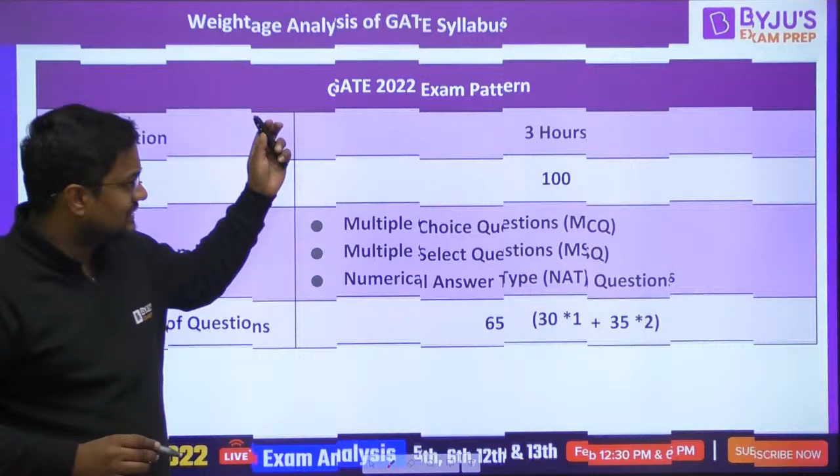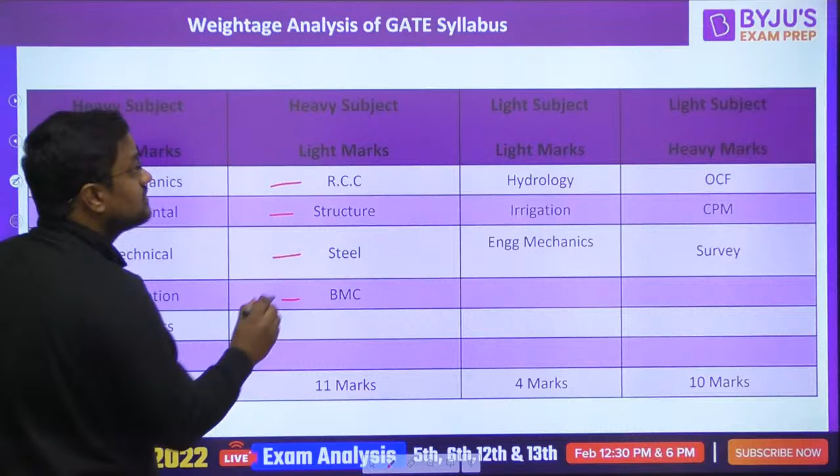Before that, I'm coming to the topic. Just don't see this, otherwise your focus will be diverted. So you all are tensed - why are you tensed? Why are you nervous?

Because you are thinking that if your GATE examination does not go well, then your career will not be so bright. You are thinking like that. Let me tell you one thing, many students already know this. I have told them that with a good GATE score, good marks, good rank, you are getting a very good future, very good MTech college, very good PSU, very good MTech or branch. But a very good career is not only through GATE.

There are multiple exams after that also, like BARC, like state PSUs, like many PSUs that take their own exam, like Engineers India Limited. I'll give you a list also, I'll give you that list today.

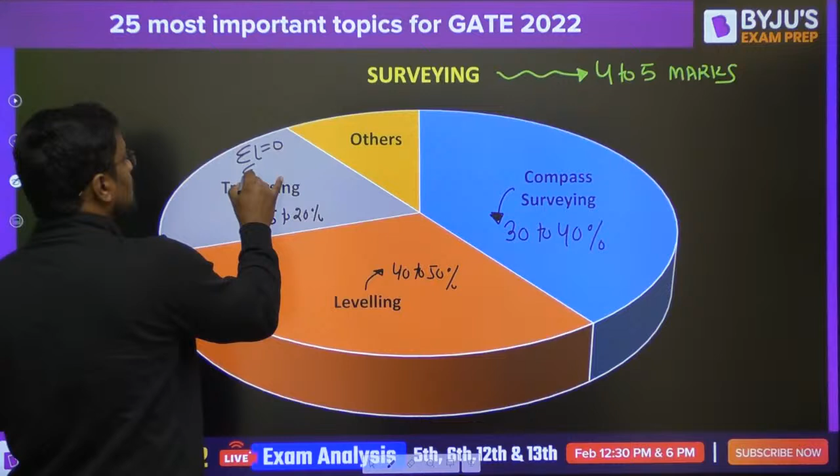And guys, here traversing you can expect 15 to 20% questions. And what will be coming most of the times is that summation of latitude equals 0, summation of departure equals 0 - on basis of this equation some question will be coming. And from all other topics, guys, you can expect around 5 to 10%. Like chain surveying is important for engineering services, but not for GATE.

Chain surveying, tachymetry, GPS, GIS, remote sensing, photogrammetry, plane table surveying - you can expect 5 to 10% questions from these. Guys, if you are giving GATE 2023 or 24, then you should go in depth for these topics.

And if you are giving GATE 2022, you should at least revise these topics: compass surveying, leveling, and traversing. In traversing, what is the numerical coming? Summation latitude is equal to 0, summation departure is equal to 0, or any numerical based on latitude and departure, because that topic is all about that.

In leveling, guys, reciprocal leveling or correction for curvature is most important. And in compass surveying, declination and local attraction are most important. Already, when I'm saying this, I'm assuming that you know bearing and all about included angle.

So have you got this? So in surveying, these three topics are the most important. And in this, what are the subtopics? Correction and reciprocal leveling, and latitude and departure - traversing is all about that only. So these are the topics for surveying.

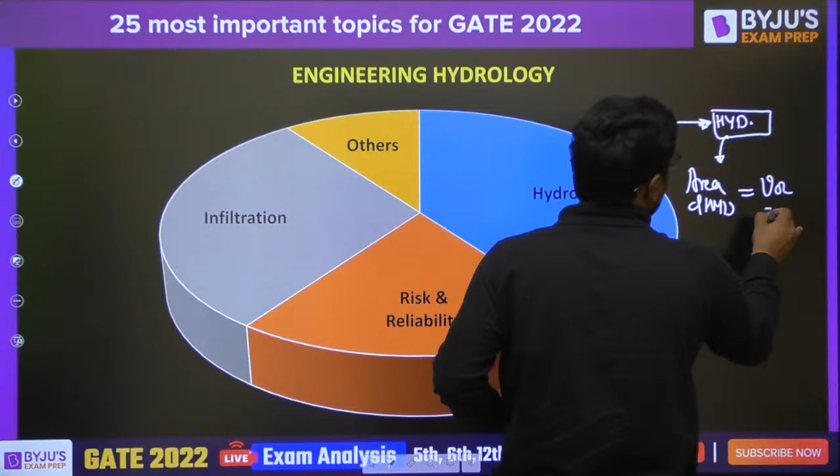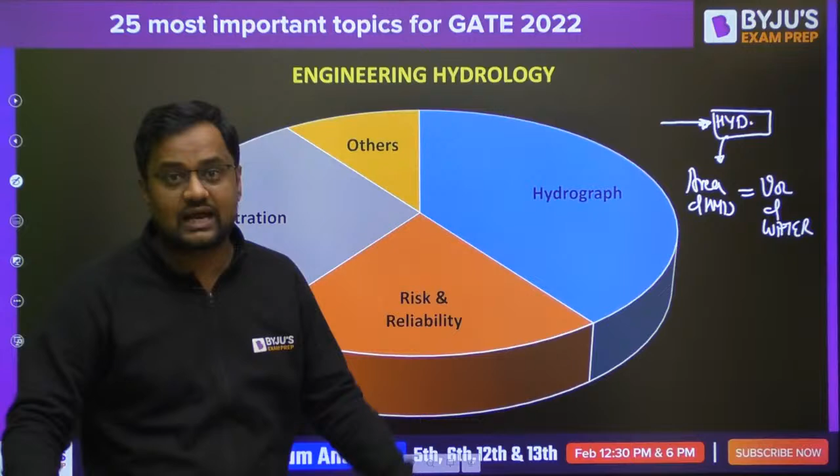Now hydrology. In hydrology, guys, in hydrograph, 90% of numericals are solved from one concept: area of hydrograph is equal to volume of water. Guys, in previous year questions, if you solve 40 questions of hydrograph, you will see that 90% of those questions are solved from this concept - area of hydrograph is volume of water, whether it is unit hydrograph or direct runoff hydrograph.

Then, guys, infiltration. In infiltration, there is Horton's curve, phi index, and W index. I'm writing phi and W together because both are average values, while Horton's curve is infiltration that is varying. Now for GATE and for engineering services, all are equally important, but for GATE this is more important. So if you want to practice more and revise more, in infiltration you can go for phi and W index. Although a couple of times questions have been asked from Horton's curve as well. But still, if time is less and you want to study only limited data, focus on phi index and W index, hydrograph, and then if time is there, you can go for risk and reliability.

Guys, risk and reliability is just a 10 minutes topic. In 10 minutes you can understand and solve all questions. So 3 topics from hydrology will be hydrograph - in hydrograph there are so many topics, but most questions will be solved from this equation: area of hydrograph is volume of water. Now infiltration - these 3 topics will be there, but for GATE point of view, phi and W will be more important, along with risk reliability.

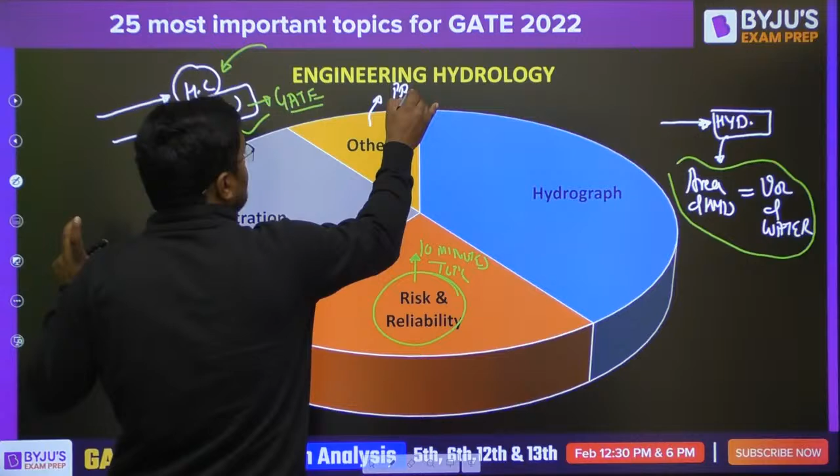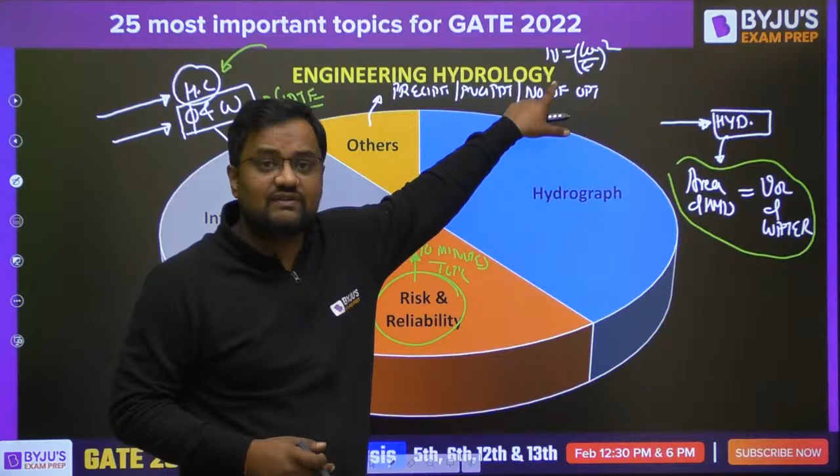Now others will have 10% or 15% chances. What are others? Others will be precipitation, average precipitation, the number of rain gauges. Guys, the formula for optimum number of rain gauges, N equals CV by epsilon whole square - hardly a question has been asked from this in GATE in the last 25 years. Yes, the question is asked in engineering services objective and subjective, but in GATE, I think 0, 1, or 2 times the question has been asked in the last 25 years.

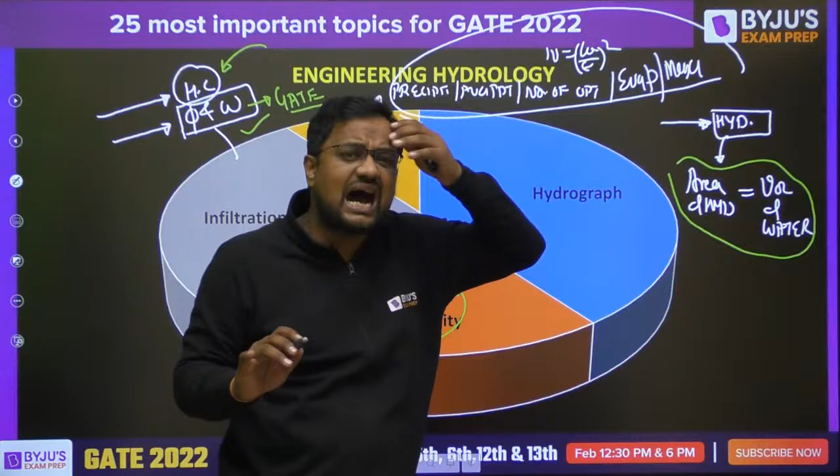Now, evaporation, Colorado sunken pan, ISI pan, methods of evaporation, factors affecting evaporation, Meyer's equation - all these topics consist of 5 to 10%. In engineering services these topics will be coming, but in GATE, all these topics are hardly or rarely asked. So you can go to hydrograph and phi and W.

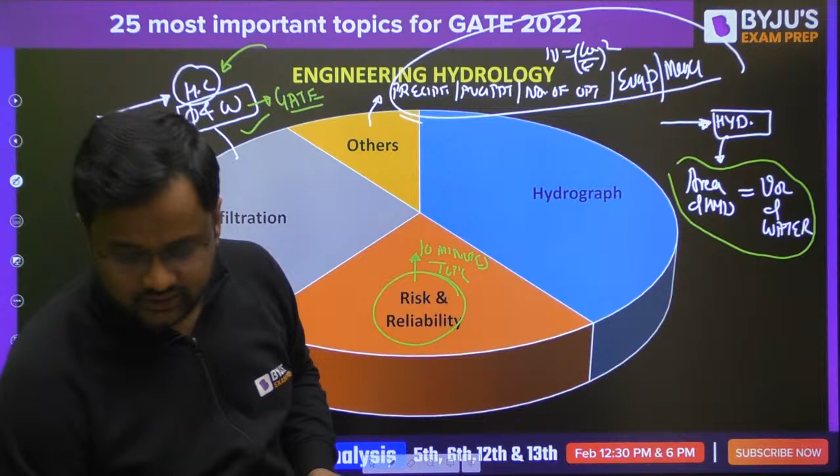Risk and reliability I'm not counting in the 25 topics because it is very, very small. Everybody, please let me know, are you understanding me or not? Share the session with everybody.

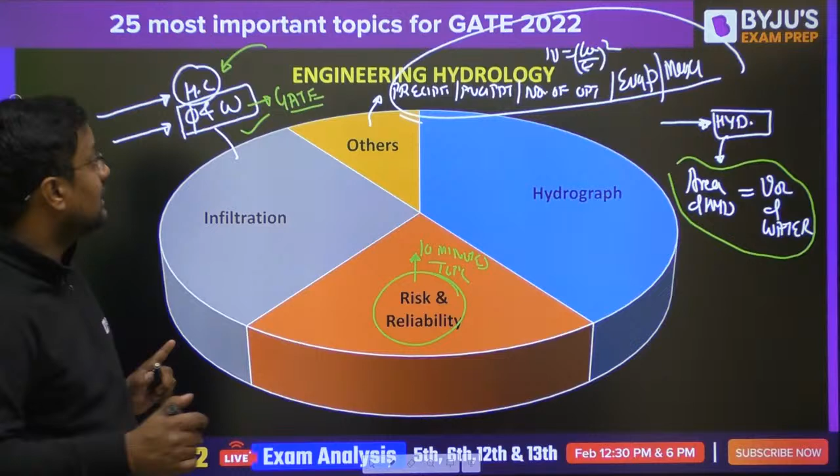I have told you the topics for till now only two subjects. First is surveying - traversing, compass and leveling. Then it is hydrology - hydrograph, risk and reliability, and infiltration. Surveying is coming 4 to 5 marks and engineering hydrology will be coming around 2 to 4 marks. If you study these three topics, out of 4 to 5 marks, whatever is coming, you will be scoring 90%, I think here it is 100% if you study these three topics.

Now coming to the next subject - strength of materials. This subject is having a weightage of 11 to 13 marks in 2011, 2010, 2012, 2013. But from last 2 to 3 years, the average weightage you can expect from here is 7 to 8 marks, even I should not write 7 - why is it, this is my subject so I should write heavy - no, 6 to 8 marks. But if you see 2010, 11, 12, 13, it is 11 to 12 marks.

Many students are doing one mistake, that they are taking the weightage of a subject from the average of last 30 years. Guys, no. Last 5 years average you have to take, because many reasons. First, in last 5 years, 3 to 4 new subjects have been added, like railway, airport, building material, PERT CPM, engineering mechanics. So last 3 to 4 years, 4 to 5 new subjects have been added.

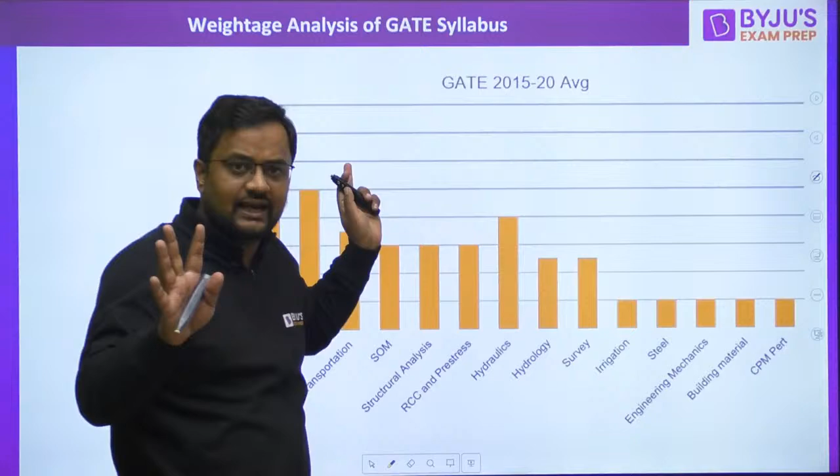What are the opportunities without GATE, that I will tell. What is the cutoff? Toppers' marks I will tell for every category. How many percentage of people will be clearing, that also I will be telling you at the end.

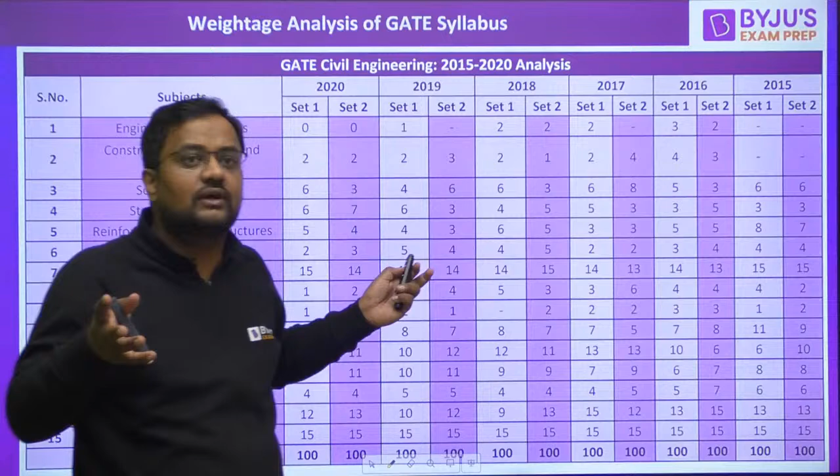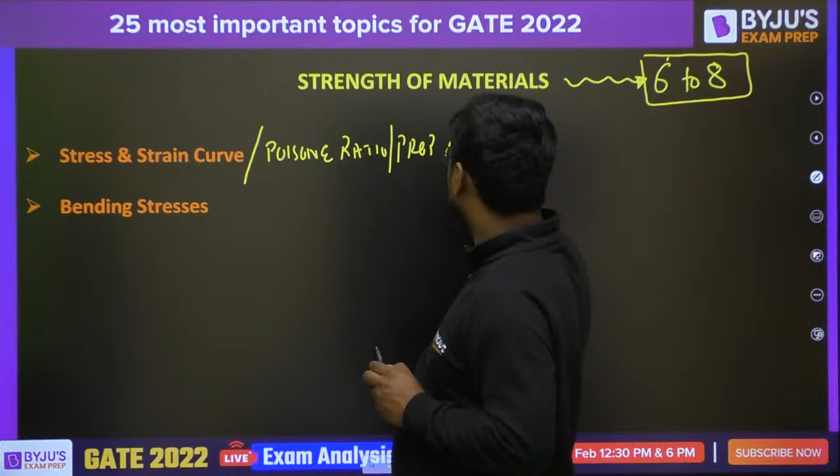Now, 2 subjects have been done. Now SOM - in SOM, the most important topics are stress strain curve. In stress strain curve, I am assuming that Poisson ratio is also here only - Poisson ratio, properties of material, deformation of bar, that PL by AE, deformation - all these are here. Then bending stresses.

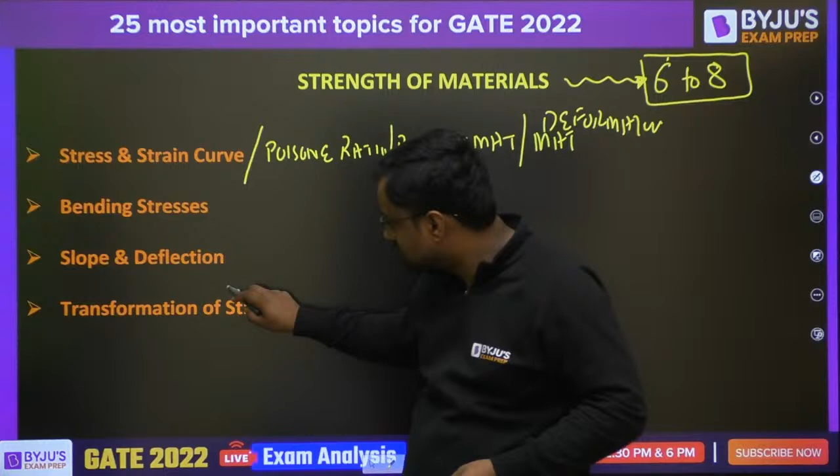Shear stress is not that important as bending stress. The sigma by y is equal to m by I is equal to E by R, having more numericals, more application on the GATE exam rather than tau is equal to SAy bar by IB. Then it is slope and deflection and transformation of stresses. Transformation of strain is not that important. Mohr circle for stress is important. Mohr circle for strain is not that important. Strain rosette is not that important. So transformation of stresses - if you have limited time, then you can skip transformation of strain.

Now coming, these from 6 to 8 marks, these are my 4 topics that you should study. Now coming to geotechnical engineering, it is not one of the highest weightage - it is not one of the highest weightage for the GATE exam. It is the highest, guys, it is the highest.

You can expect from here around sometimes 14, sometimes 15, sometimes 16 marks - 14 to 16 marks. But guys, many people are, since this is my subject, giving high importance to geotechnical and not to hydrology. Why? Because geotechnical is 14 to 16 marks and hydrology is only 3 marks, surveying is only 5 marks. Guys, if you see syllabus-wise, then survey is more scoring, hydrology is more scoring than this geotechnical.

Suppose survey is 5 marks and geotechnical is 15 marks. But the syllabus of geotechnical is more than 3 times that of survey. So marks-wise it is 3 times more, but syllabus-wise it is 5 times more than survey.

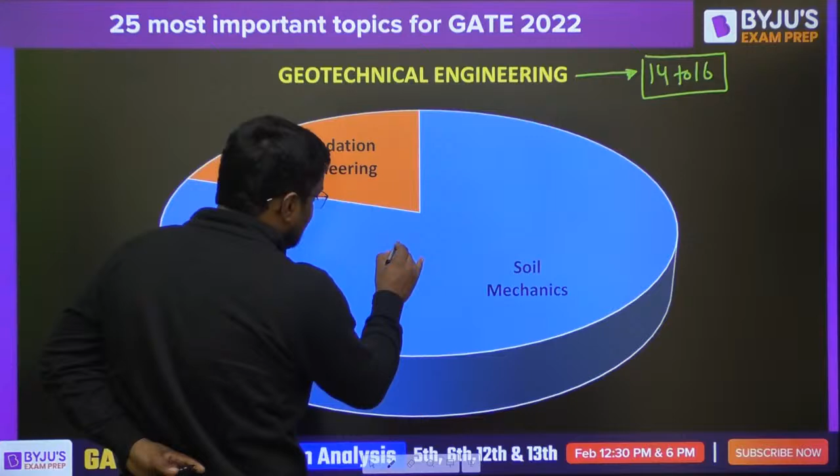So from 14 to 16 marks, you can expect around 11 to 13 marks from soil mechanics and 2 to 4 marks from foundation. Now what is important? Soil mechanics is not the topic itself. Let me come to the topic now.

Geotechnical engineering, guys - quicksand condition. I'm not saying the whole seepage, just the quicksand condition plus this: Q equals K into H into Nf by Nd. This formula is important in soil. Then another important one is Terzaghi bearing capacity.

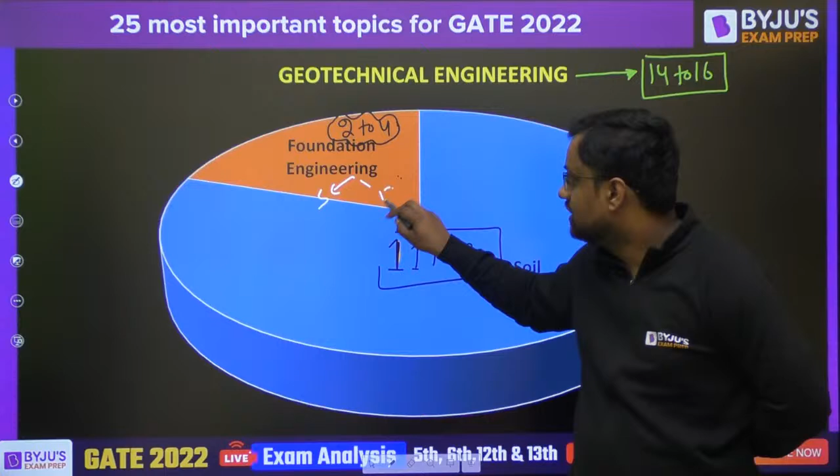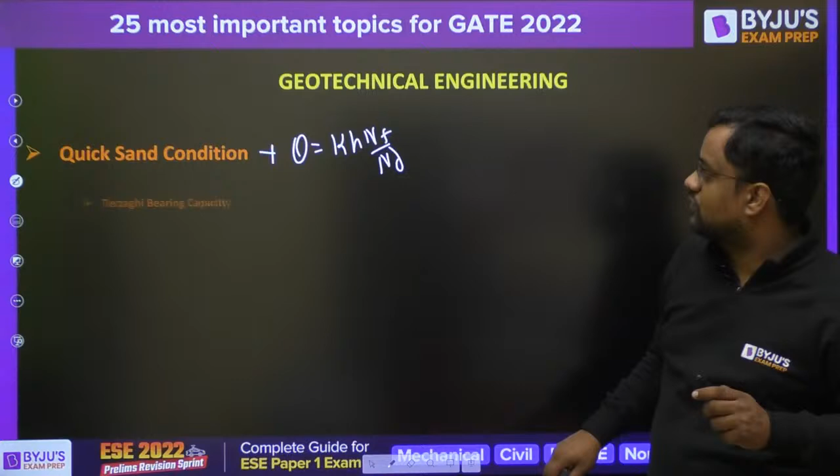This is shallow foundation, right? Foundation has two types: shallow and deep. In shallow there is Terzaghi, Peck-Hansen, Meyerhof, IS code raft - many things. But guys, even though shallow foundation has many topics like Terzaghi, Skempton, Meyerhof, IS code, 99% of questions will come from Terzaghi bearing capacity, not from Peck-Hansen, not from Meyerhof, not from IS code raft. Okay, now time rate of settlement - this formula Tv equals Cv into T by D square.

This formula. Okay, now Darcy's law: V equals KI, or Q equals KIA, or seepage velocity equals discharge velocity upon porosity - these things. Okay, and the phase diagram - I'm covering all these equations. Se equals WG, gamma bulk equals G plus SE upon 1 plus E into gamma W. Then for gamma dry, S will be 0. For gamma sat, S will be 1, and N equals E upon 1 plus E. Then gamma submerged equals gamma sat minus gamma W. All these formulas are most important.

Guys, I'm not saying anything skippable for pile foundation. Pile foundation - whether it is clay, whether it is sand, whether it is group capacity of pile - all are equally important. Yes, in pile foundation, I can say come back to this.

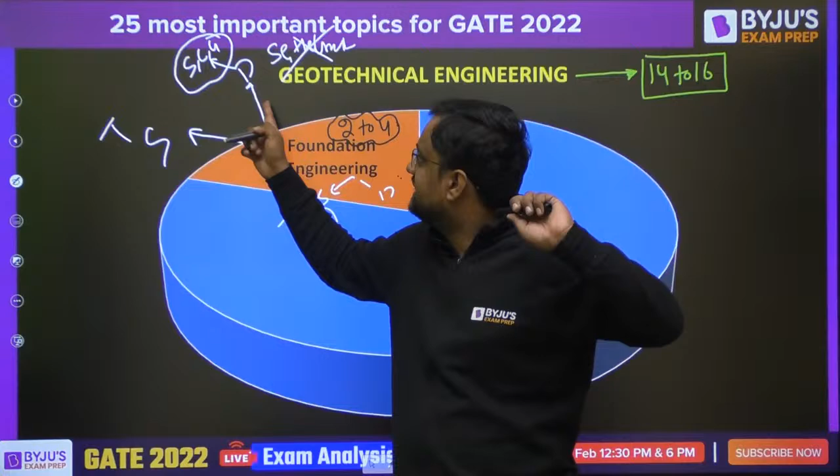In foundation engineering, it is shallow and deep. In shallow, what is important? Terzaghi. In deep, what is important? Sand, clay and group capacity - all equally important. Now settlement you can neglect - there are some numericals of settlement also, but settlement of pile you can neglect. In shallow, focus on Terzaghi. In deep foundation, focus on sand, clay and group capacity. Settlement you can neglect, okay.

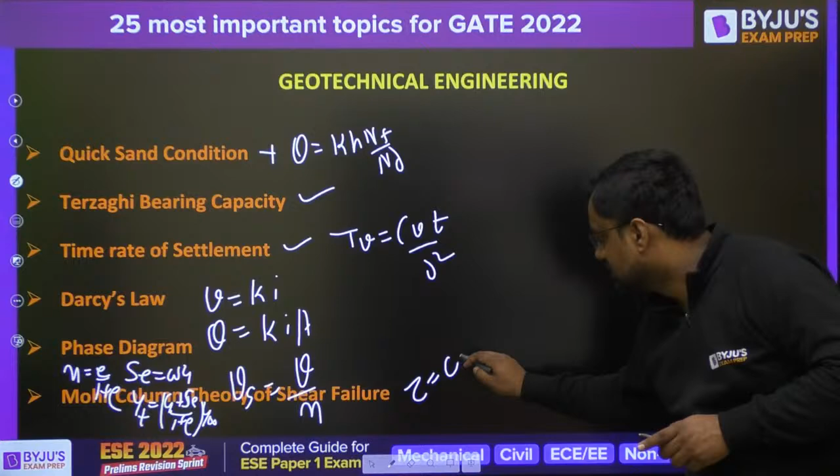And in soil mechanics, these are the important topics. Yes, you can't neglect Mohr-Coulomb for now. Tau equals C plus sigma tan phi. And then the sigma 1 and sigma 3 relation - that is also important.

So if you study this much, guys, and you are 100% accurate - I am assuming you will be 100% accurate - then in these topics you can expect at least 8 to 10 marks. But I'm assuming you are 100% accurate in these topics.

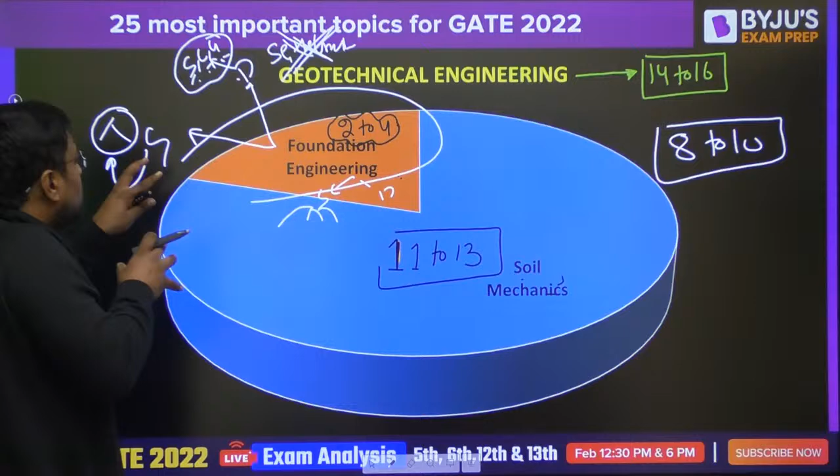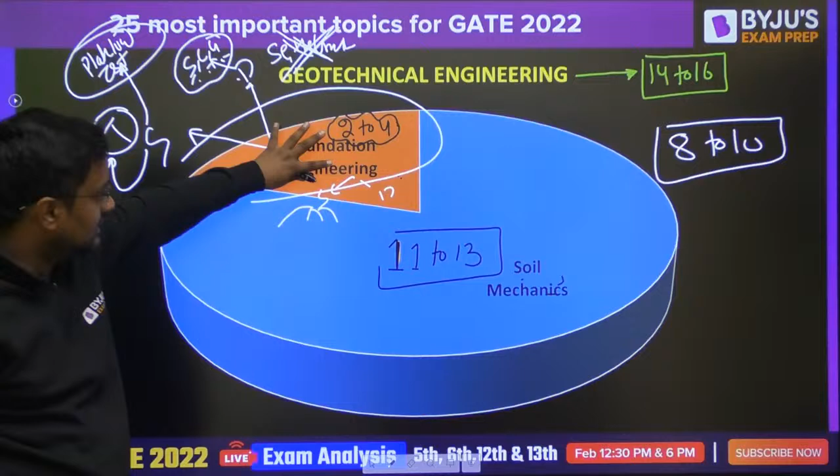Because if foundation comes, then you study Terzaghi. If you study Terzaghi from shallow foundation and the three topics from deep foundation, then 100% will be covered. To be safer, in shallow foundation do one more thing - plate load test. There are a couple of formulas there, nothing to understand, just empirical formulas.

Do that - 100% coverage here. And with these topics that I discussed, you can cover 60 to 70% of soil mechanics, so you can expect 8 to 10 marks. But I'm assuming you will be 100% correct in that way.

Vignesh Mahajan - I have a Google Meet with him at night, 1 a.m. or 2 a.m. He has some COVID, he was feeling depressed, now he's okay.

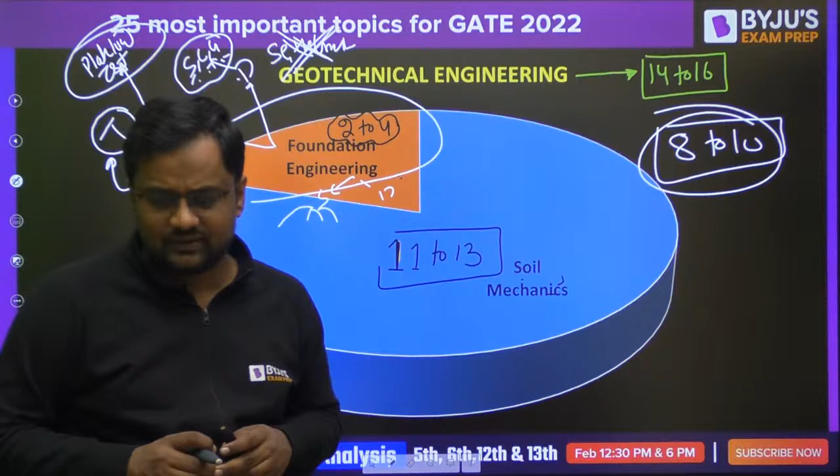Okay, now coming to fluid mechanics.

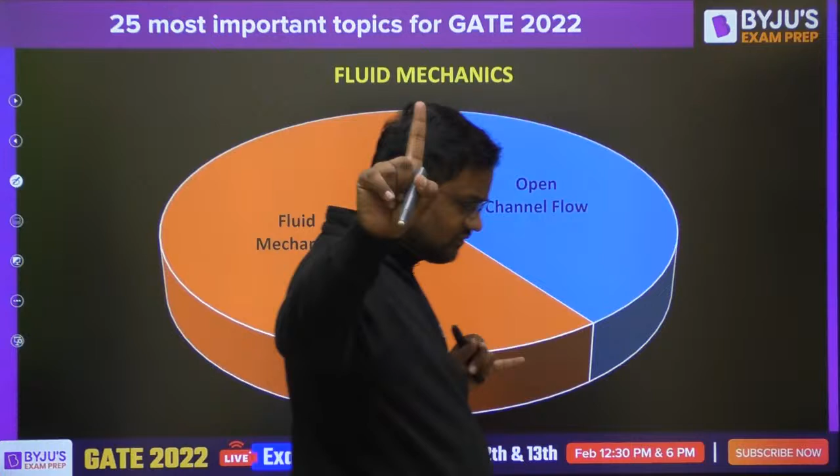Okay, now coming to the fourth. Let me see how many. First, survey - in survey, what were the important things? Leveling, compass surveying and traversing. Then hydrology - hydrograph, phi index, W index and reliability. Then SOM, that is bending stress, transformation of stress, Mohr circle, stress and strain, slope deflection. Fourth is soil mechanics. Okay, thank you Aruj, Sahil, Aman, everybody is here.

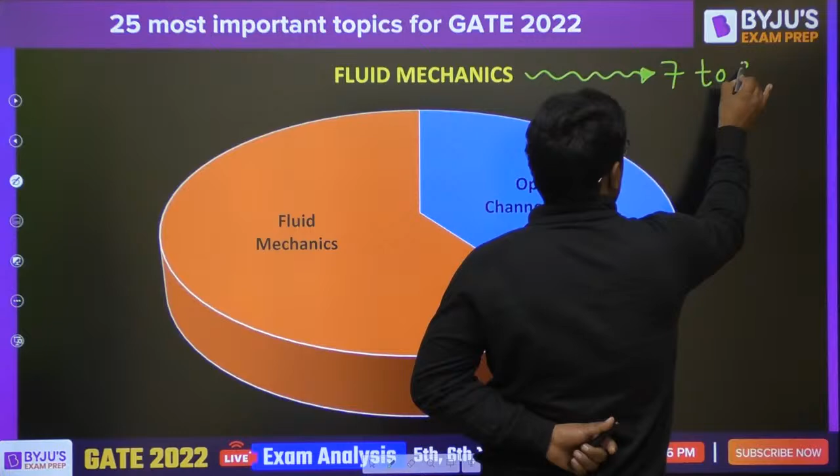Now coming to fluid mechanics. Fluid mechanics is quite interesting. Guys, you can expect 7 to 9 marks. And if I differentiate in terms of syllabus, then fluid mechanics and machine will be around 80 to 70 hours. I'm assuming fluid mechanics and machine both approximately.

That depends on individual to individual. My way of teaching is a little bit fast, so suppose someone is teaching in 80 hours, then I can finish in 70 hours because my speed is a little bit fast. And OCF is around 18 hours, or 15 to 16 let us say.

So syllabus wise, this is at least 6 times more. The syllabus wise fluid mechanics is 6 times more than open channel flow.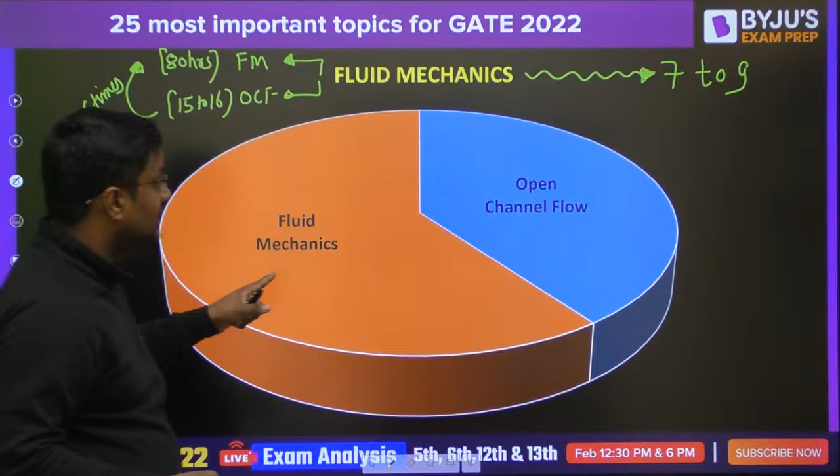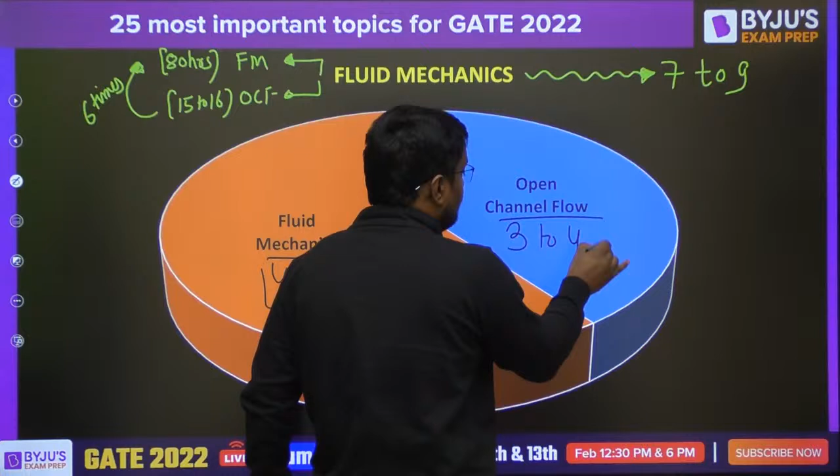But if you see it in terms of weightage, then out of 7 to 9 marks, 4 to 6 marks will be of fluid mechanics and 3 to 4 marks of open channel flow. So it will be around 35 to 45%, and this will be around 55 to 65%. So it is quite obvious that open channel flow is quite scoring than fluid mechanics.

Praveen is asking what number of MSQ we can expect. In computer science, I'm not exactly 100% sure, but it's 12 to 14 MSQs. In electrical engineering, it is 0.

I don't know how IIT can do this, because I totally respect IIT Kharagpur, but if any organization says there will be 3 types of questions - MCQ, MSQ and NAT - then how can the total 65 questions, 100 marks comprise only of NAT and MCQ, with 0 MSQs? That is quite a question to IIT Kharagpur. How can you say there are 3 types of question when the third type is 0? And in electronics and communication engineering, there are 14 MSQs.

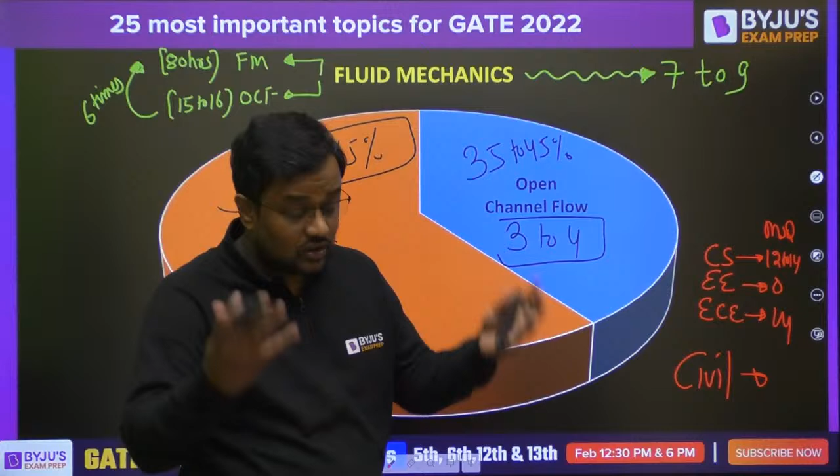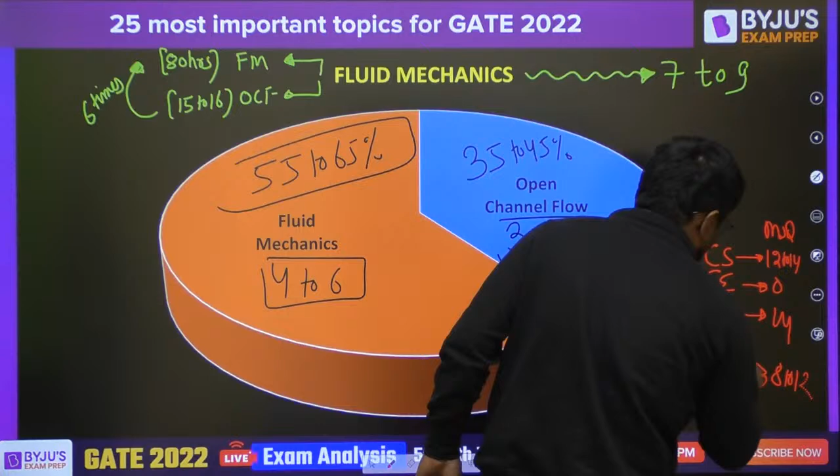For civil guys, it can be anything depending upon IIT Kharagpur professors and with what thought they are making the paper. But my guess, that is a total wild guess, will be around 8 to 12 - or 8 to be on the safer side, rather than writing 8 to 10, I am writing 8 to 12. To be 100% safer, I can write 0 to 65.

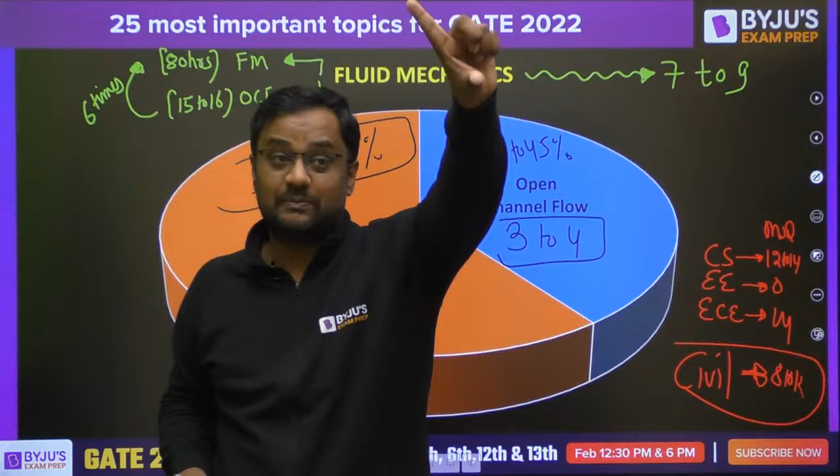I hope you all studied Gumbel's method, X1 and X2. Even for peak discharge, we say from X1 to X2, remember that? So if I have to be 100% sure, I can write from 0 to 65 - it will be more than 0 questions of MSQ, less than 65. Like in Gumbel's method, X1 equals XT plus FC into SE, and X2 equals XT minus FC into SE. Okay, now what are the important topics of fluid mechanics and open channel flow?

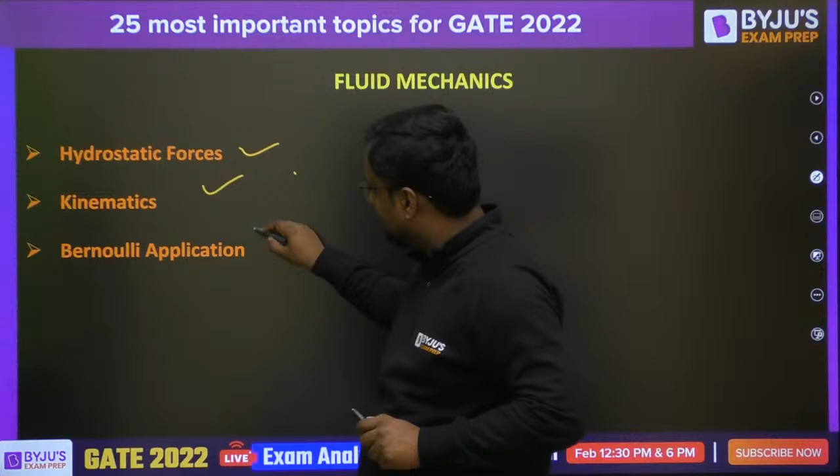Let me see here. Okay everybody please see - Hydrostatic forces, kinematics, Bernoulli application, flow through circular pipes. These topics are most important for fluid mechanics.

And guys, in open channel flow, I'm not writing anything important. In open channel flow, building material, PERT CPM, engineering mechanics, all topics are equally important. Only RVF will be a little bit less important, but GVF, uniform flow, energy depth relationship, all are almost same importance. In PERT and CPM both are almost equal, there is no partiality between them.

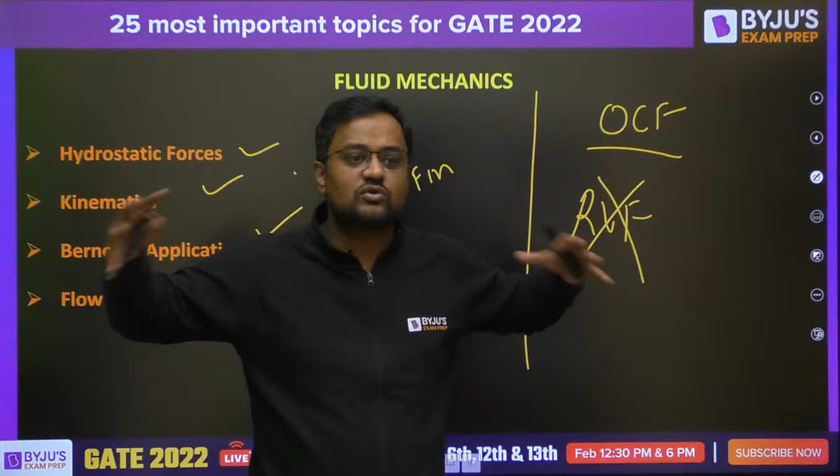Yes, we can expect that crashing will come up with less chances. So in open channel flow, in PERT CPM, in building material, I'm not writing any important thing, because that is a waste of your time - all topics there, whether building material, brick or cement or any other thing, will be equally important. So I'm not wasting time on that.

Santu is saying the smile is priceless. Thank you Santu. Now these are the important topics for fluid mechanics. If you study these topics, and since open channel flow is already a small topic, you can expect to score 70 to 80%.

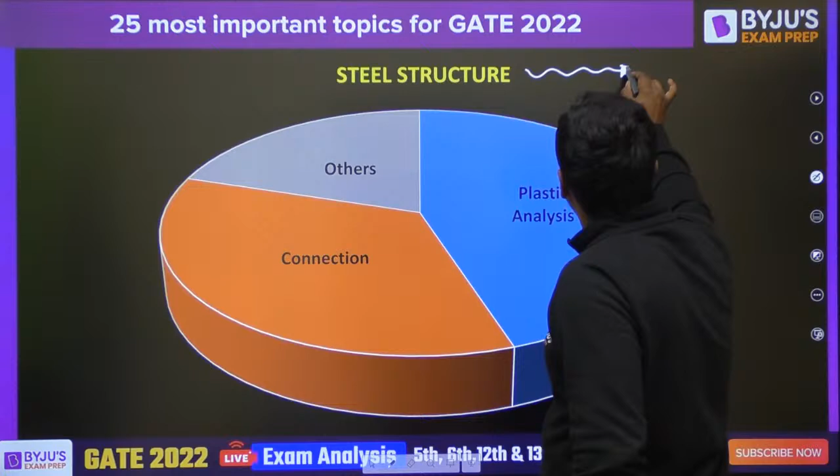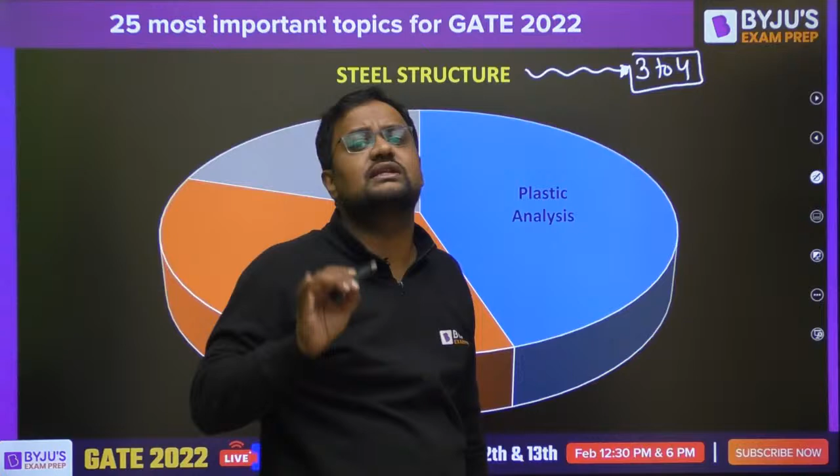Now steel. Guys, steel has one specialty, that it is a very heavy subject with very less marks. The weightage of steel structure, the syllabus of steel structure is, I think, 4 times or 3 times more than survey, 5 times more than hydrology, 5 times more than irrigation, 8 times more than PERT CPM, but weightage is very less. So it is one of those subjects. In my time we didn't study this, because the cutoff wasn't that hard.

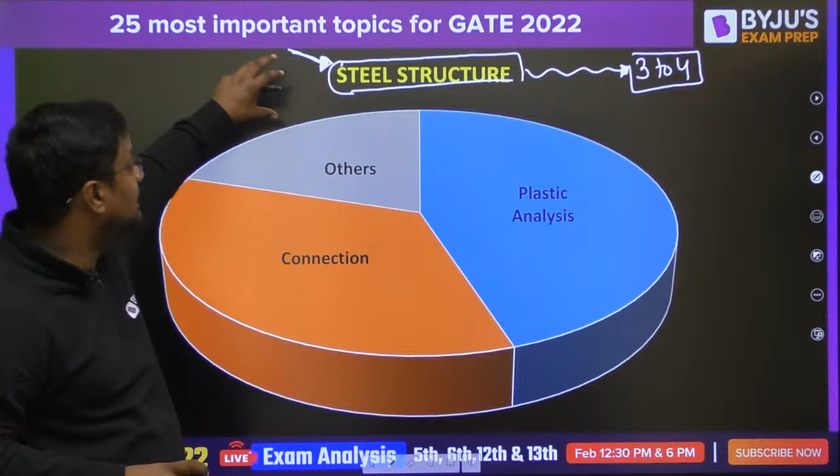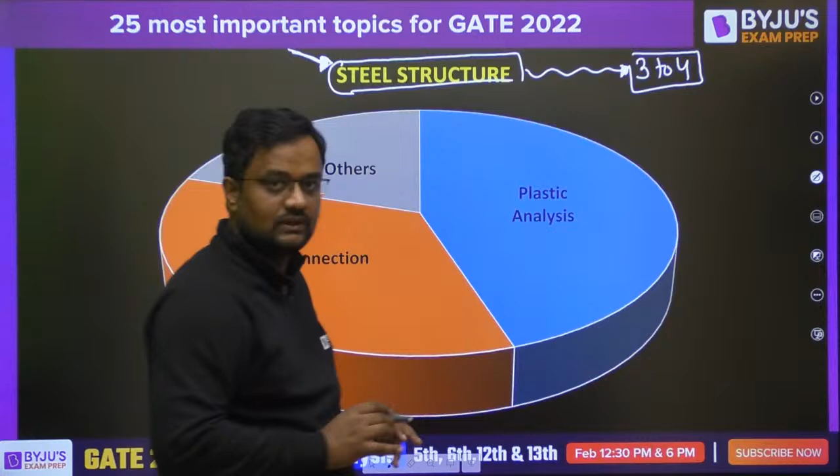So in steel structure, as the syllabus is too much and weightage is very, very less, it is important for engineering services, both objective and subjective - a huge proportion is steel structure there, but not in GATE. So I would recommend, because this is one subject many students have not studied - there's a trend of civil engineers not studying steel structure.

You should go only for plastic analysis and then connections. First your motive should be plastic analysis, then connections, then leave other things like girders - you can leave those. If you have less time, if you have not studied this till now, please don't study it. Only go for plastic analysis and its revision.

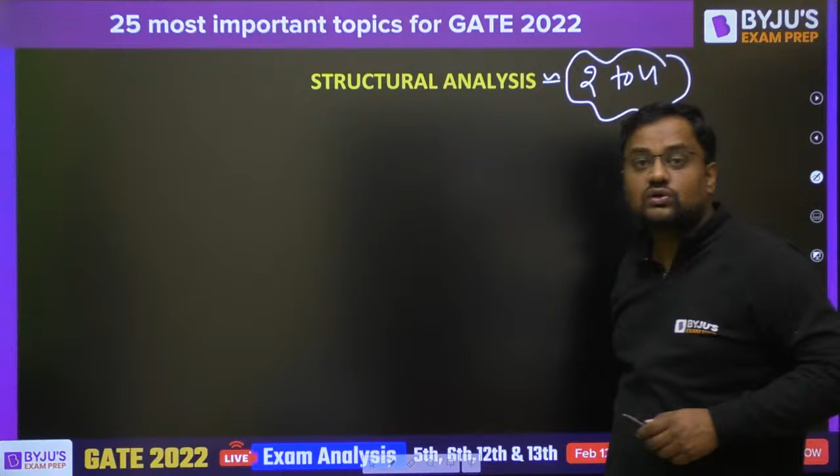Now another subject, structural analysis. Again, the brother of steel structures, having a huge syllabus but very less weightage. I guess the weightage will be 2 to 4 or even less. Huge subject but less weightage. It is important for engineering services subjective, but not here in the GATE examination. Huge subject and very less marks.

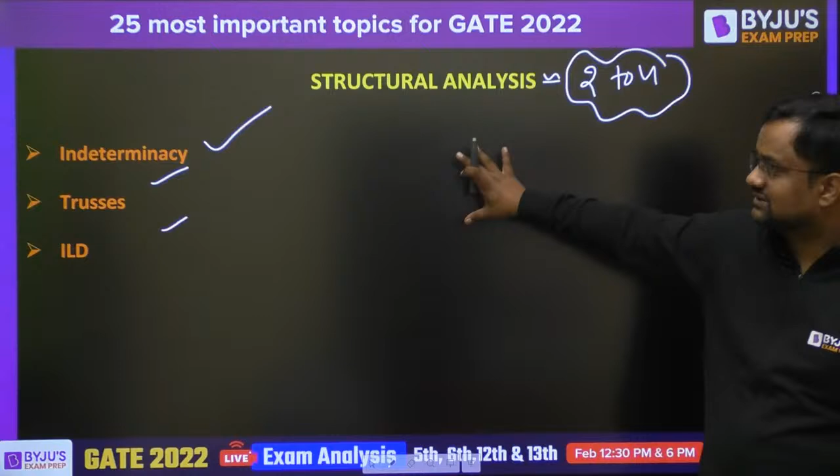Important topics will be indeterminacy (static and kinematic), trusses, and ILD - these 3 topics. And guys, if you have not studied in that much depth, go for only these 2: indeterminacy and ILD. Leave trusses then.

Then going to the next subject, RCC. RCC is a big subject, but weightage is also decent - not very small, not very high. RCC you can expect around 6 to 7 marks. And the most important topics of RCC will be properties of concrete.

Then, beam design by LSM - first step is calculation of neutral axis. Second step is calculation of critical depth. Third step is comparing whether XA is less than XC, whether XA equals XC (that is balanced), or XA greater than XC (that is over-reinforced). Fourth step, calculating moment of resistance, or AST.

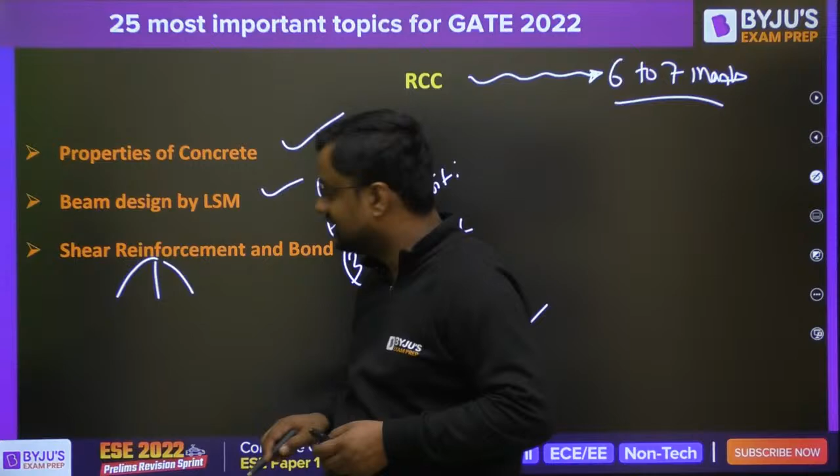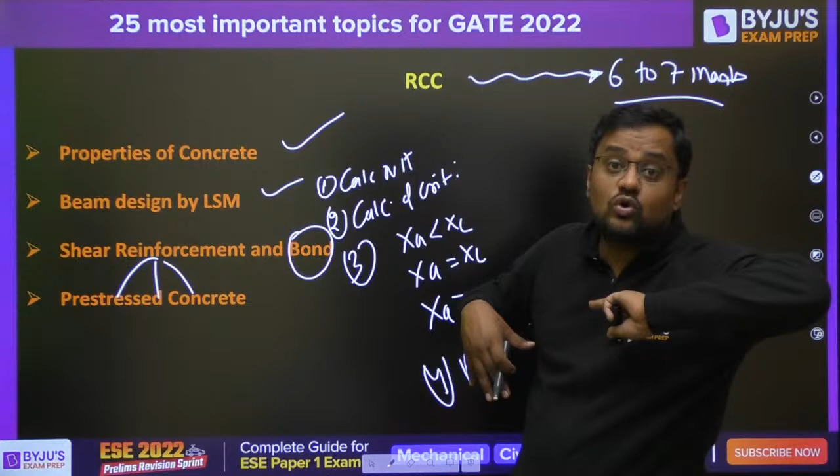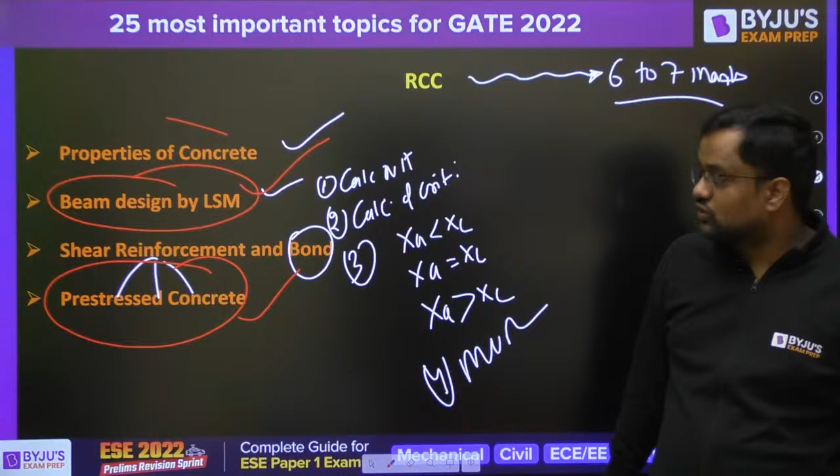Even if you want to go in more depth, the most important topics will be this and this - beam design and pre-stressed concrete, these 2 are most important. Even if you want to leave the revision of other things, you can leave those, but these 2 are most important. And one more thing.

From here you can expect a 1 mark question - but all these topics will give you a 2 marks question.

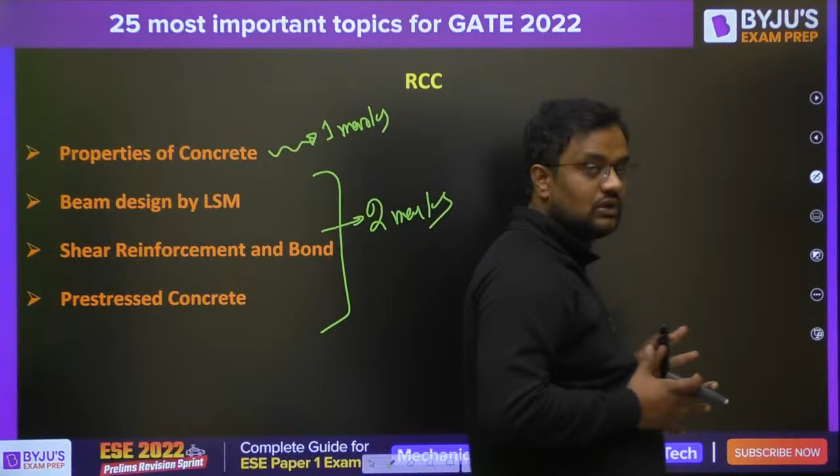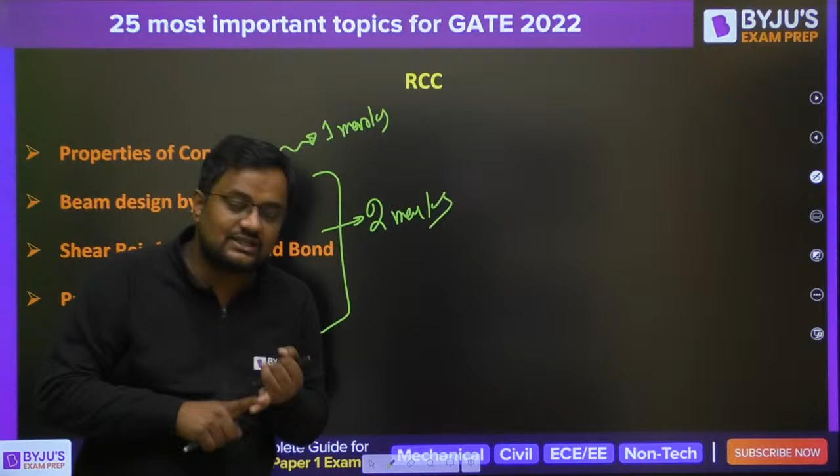And we have more subjects now. At the end, I'll tell you what you can expect cutoff-wise for NIT M.Tech, what you can expect for new IITs, what you can expect for old IITs, and what you can expect for PSU. At the end, I'll be telling you that as well.

Now, environmental engineering - again, after soil mechanics, the most weightage. Around you can expect 12 to 15 marks, 12 to 14 marks, let's say, better to write.

Now in environmental engineering, it is hardness and alkalinity. I'm not knowing about environment too much - something about non-carbonate hardness, carbonate hardness, total hardness, something like this. Carbonate hardness is the minimum of these, something like that. Hardness and alkalinity - calcium carbonate, atomic weight 100, something like that. Something I'm remembering for 2010 and 2011.

Sedimentation - overflow rate will be coming here. Filtration. Then BOD, that e to the power minus KT, all those numericals will be important. Then activated sludge process. If I want to further narrow down the most important topics here, it will be hardness, sedimentation and BOD - because filtration and ASP are important for GATE, but they are much more important for engineering services examination.

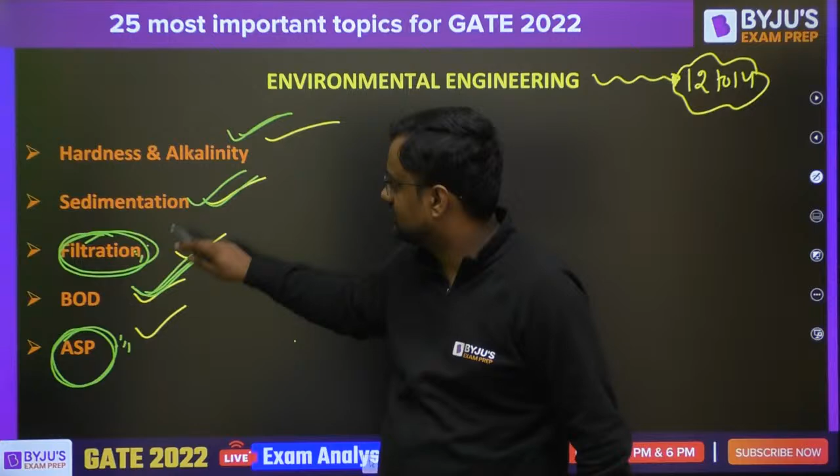For GATE, these 3 are important. Although all 5 are most important, still from these 5, these 3 are most important.

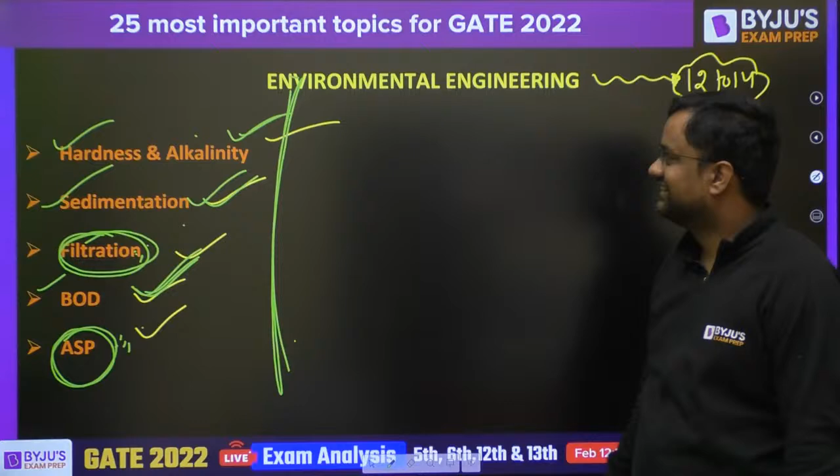In irrigation engineering, guys, water requirement for crops, duty delta relationship, delta is equal to 8.64 B by D, something like that. Gravity dam, elementary profile, these are important.

Now transportation. Irrigation you can expect around 2 to 4 marks. And if you study this, guys, suppose 3 questions come, then at least 2 questions will be coming from these 3 topics.

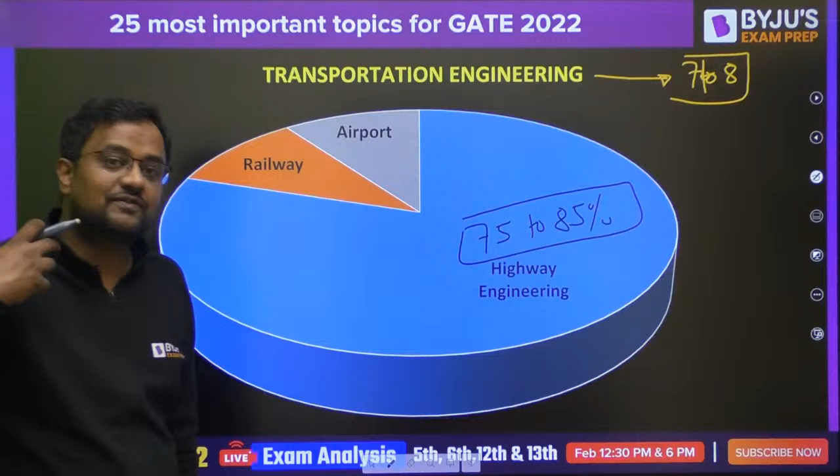Now transportation engineering weightage has increased over the last 7 years. In the last 5 years it is now 7 to 8 marks, earlier it was only 3 to 4 marks. Earlier it was only highway, now it is railway and airport both. But if a question comes in transportation, most chances, around 75 to 85%, that question will be from highway engineering. Let me tell you, the most subject I have taught till now is highway - I haven't taught it here online, but in offline I have taught it the most, more than hydrology, more than survey, more than SOM. Railway chances are around 10 to 15%, and airport around 0 to 5%.

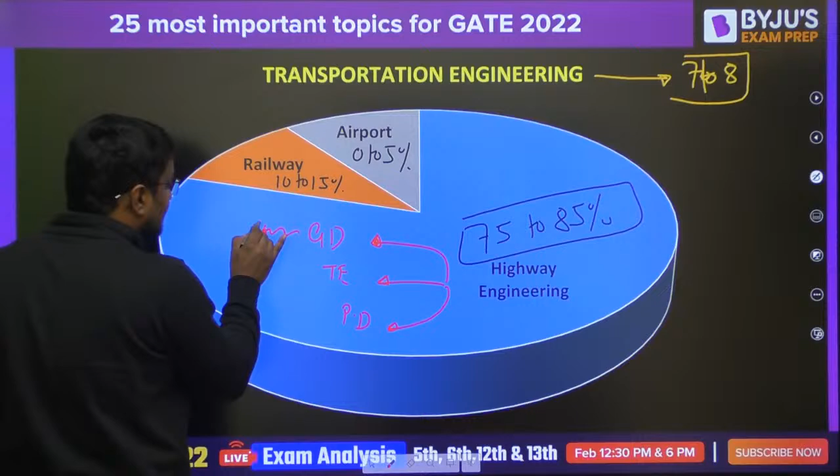Now coming to highway. Highway engineering consists majorly of 3 topics. One is geometric design - sight distance, super elevation, valley curve, summit curve. Traffic engineering is capacity, Qmax is equal to Vf into Kj by 4, Greenshield model, Vf by 2, Kj by 2, then rotary formula Qmax is equal to 280 W1 plus E by W1 minus P by 3 upon 1 plus W by L. Webster method, cycle length C naught is equal to 1.5L plus 5 upon 1 minus Y. And pavement design. Let me tell you, 40% questions will come from geometric design, 40% from traffic engineering, and very few from pavement design.

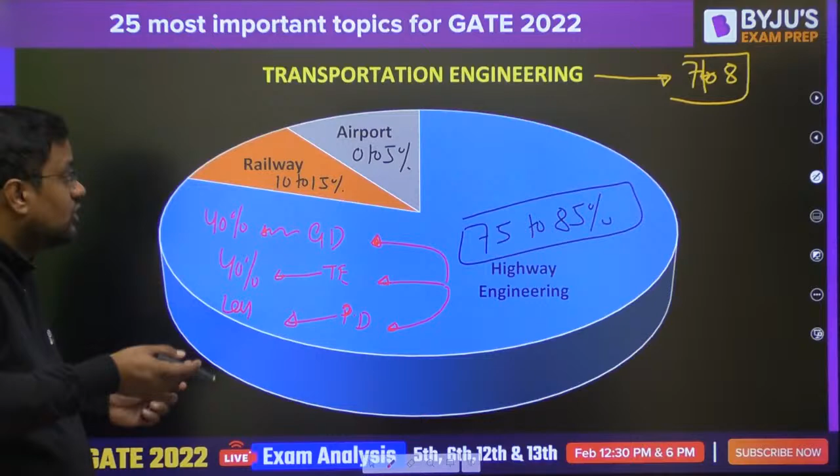Now what are the important topics of highway engineering? Sight distance - now in sight distance, is SSD important, OSD important, or ISD important? I am not Rajnikant, only Rajnikant can tell that. SSD, OSD, ISD are all equally likely. Yes, SSD and OSD have more chances because ISD is nothing - ISD is just 2 times of SSD.

Now, super elevation, Webster method of cycle design, road capacity, Greenshield model. And for railway and airport, I am not writing any important topics because I don't think they will be coming in the top 25 topics. So these are for transportation engineering.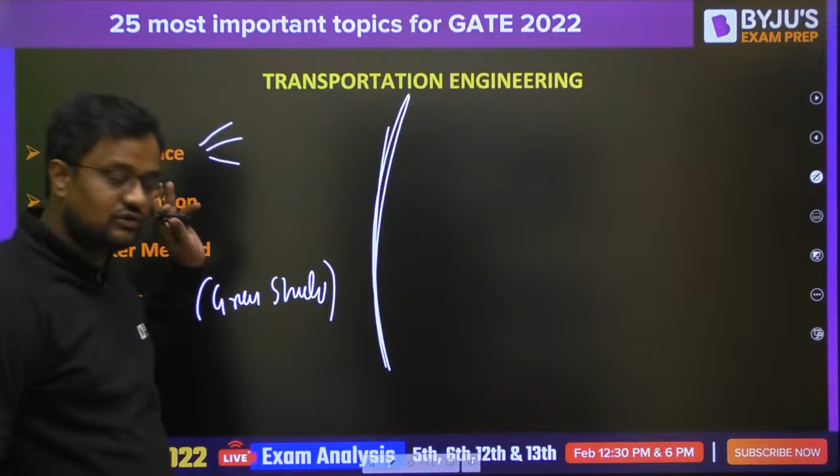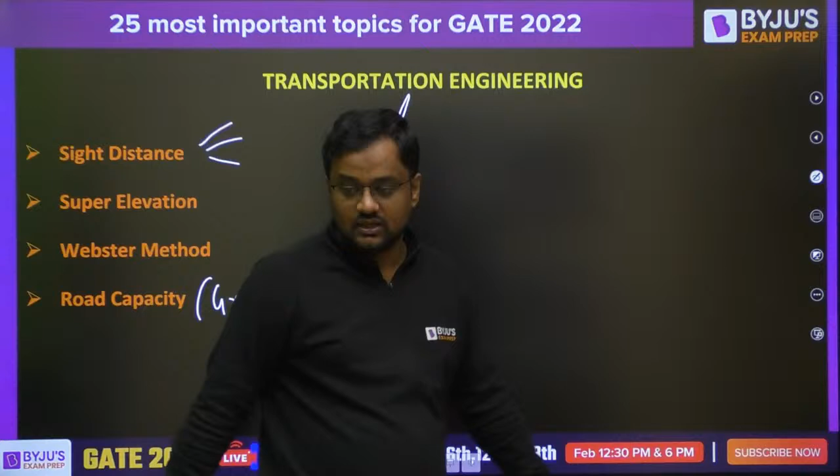Now wait for another 5 minutes. Let me tell you, you are tensed, you are nervous, you are anxious, those who are giving the GATE examination. Guys, you should be nervous, you should be tensed, you should be anxious, you should be afraid of the exam if...

...there is only one exam, GATE, in this country. In engineering services, through GATE exam. In state services, through GATE exam. In all PSUs, through GATE examination. In all NITs, IITs, through GATE examination. No - guys, majority of things will be through GATE, but there are other things as well. State service examination for assistant engineer, many PSUs take their own examination, BARC takes its own examination. So guys, don't be afraid because there are various opportunities through GATE, and there are various opportunities without GATE also - like BARC, MTech from Jamia and BITS Pilani, that is without GATE. BARC is with GATE also, without GATE also. AAI, Airport Authority, Engineers India Limited, HPCL, state PSCs - these are without GATE. So if everything were through GATE, then you should be worried. Guys, through GATE a career is built, but a career is not built only through GATE, there are many other things as well.

I hope you understood, just put a heart sign if that statement decreased your anxiousness, your nervousness. I will be with you. Yes, you should be nervous, yes you should be anxious, but when? When there is only a single examination, GATE, in this country for civil engineers.

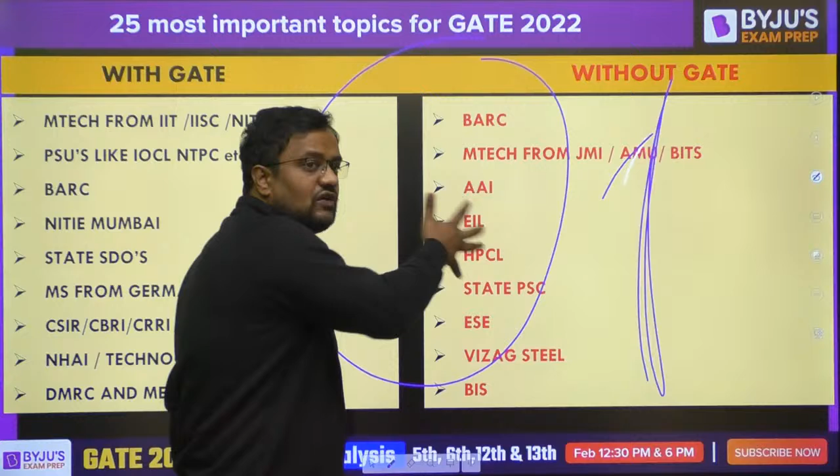I always tell, an aspirant is a bowler. Like a batsman, if he has to hit a century, he has to hit runs or survive every ball. But if a bowler has to take a wicket, only one ball is required.

Similarly, if your luck has to beat you, if your luck has to stop you from getting a good job, luck has to be good, luck has to beat you in every exam, but you only require just one exam to beat luck. Any exam, that's all.

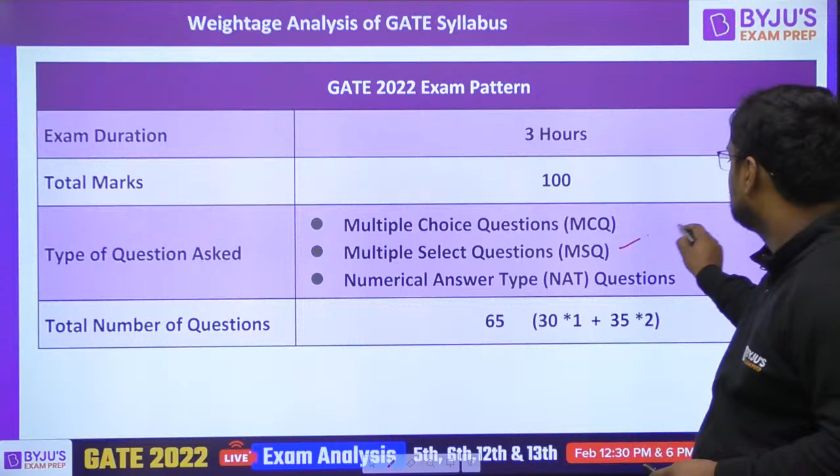Okay, now what should be the cutoff? Let me tell you, before that, this you all know, I'm not wasting time on this. MSQs in electrical is 0, electronics is 14, computer science is 10 to 12. I can expect like 8 to 10 or 8 to 12 MSQs in civil examination as well.

There's no negative marking in MSQ and NAT. And how to find whether a question is MSQ? It will be given in the exam. There will not be hide and seek, like 'recognize me if you can' - no, it will be clearly written there that this is an MSQ question, and NAT you can identify, fill in the blanks you can identify. Most chances MSQ will be for 2 marks.

Now if you see the GATE topper, it is 95 marks in 2021, and in 2020 it is 90.77 marks. If you see the cutoff out of 100: for general it is around 30 marks, for OBC it is around 26 to 30, and for SC/ST it is around 20 marks.

Now see, if 1,30,000 students are giving the civil engineering GATE exam in GATE 2022, then approximately 17 to 20% people qualify. Let it be 20%. Qualifying GATE students will be approximately - it is actually 17% rough data from last 5 years, but approximately 20% will be how much? 13 to 26,000. 26,000 people will be roughly qualifying, meaning more than these marks, 30 or 20.

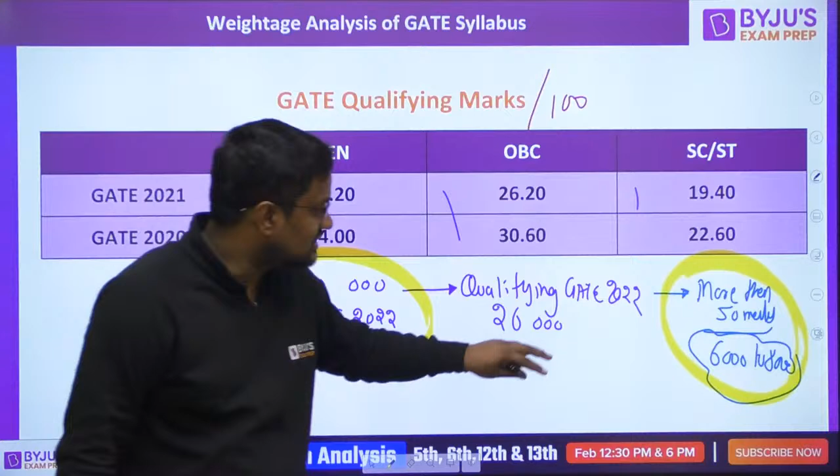6,000 people will be fighting for their career, fighting for their future in those 3 hours on 12th February, whether it is forenoon or afternoon. These 6,000 people will be having real competition. And guys, you know what?

When there is a match between India and Pakistan, what commentator says, what cricket expert says, is that in a match between India and Pakistan, the better team will not be winning. No, that day the better team will not be winning. That day, that team will win who controls their aggression and whose nerves will be of steel - meaning they can handle the pressure. Handling pressure is more important rather than cricketing technique in matches like India and Pakistan.

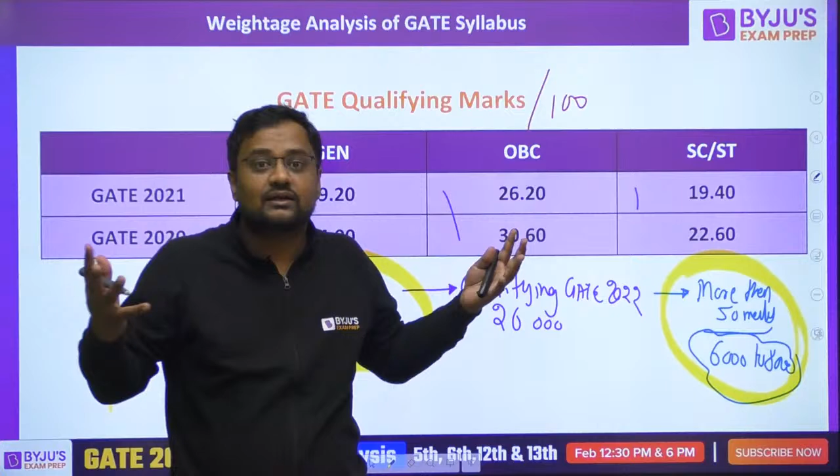Because many great batsmen and bowlers become flop that day. Shoaib Akhtar, Wasim Akram, then Sachin and Sehwag - Sachin put an uppercut six in South Africa in the 2003 World Cup. At that time Wasim Akram, Waqar Younis, Shoaib Akhtar were top bowlers in the world, and scoring 272 odd runs in 2003 was almost impossible. At that time 270 was too much - yeah, now 300 is also chaseable. But those 3 fast bowlers were not able to control their nerves, their aggression.

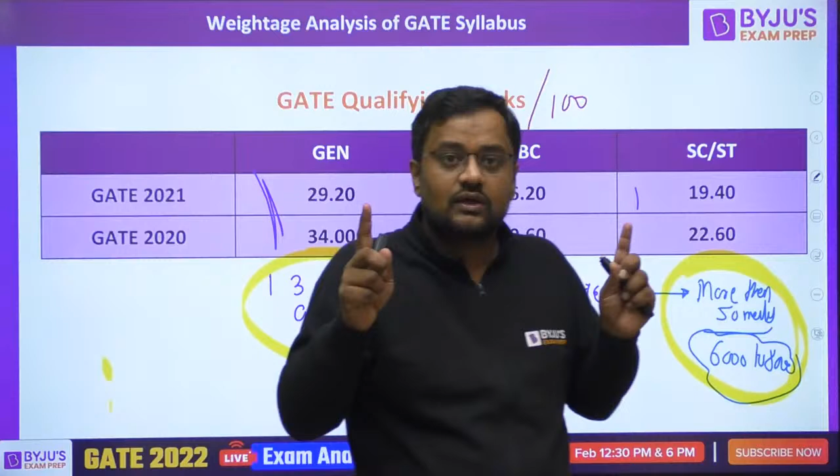The same thing will be with you in those 3 hours. Your concepts are now whatever they are, that is your concept - you cannot improve your concepts too much now, you cannot improve your depth of knowledge too much in the coming 4 days. But what can you improve? You can improve the calmness, the controlled aggression in those 3 hours - that will be much more important than concepts now. Yes, if you're asking the same thing in July, April, August, September, I would say what rubbish, go for the concepts, go for the concepts.

But in these last 4 days, more than compression, more than concepts, it should be the controlled aggression that you will be performing. Now, out of 1,30,000 people, 26,000 will be qualifying, and more than 50 marks will be around 5 to 6,000. Let me tell you, cutoff will be around this year as well.

If you want NIT, a decent NIT, then you should be getting more than 40 marks. But if you say I want NIT Trichy, NIT Warangal, NIT Allahabad structures, then you should be getting more than 52 marks. But more than 40 marks, you will get some of the seats in NIT. Now with IIT, new IITs, you should be getting more than 54 marks. Old IITs, it should be more than 60 to 62.

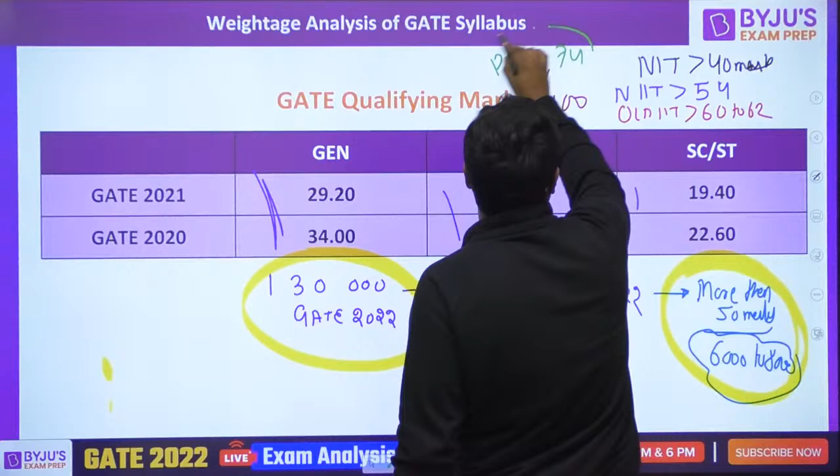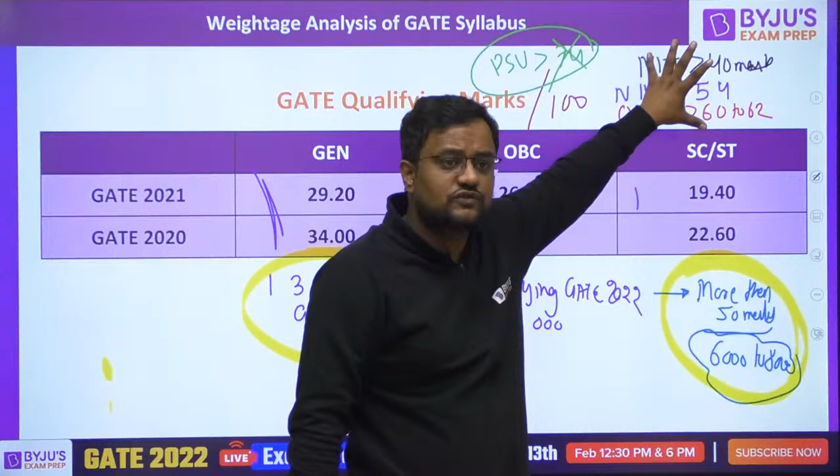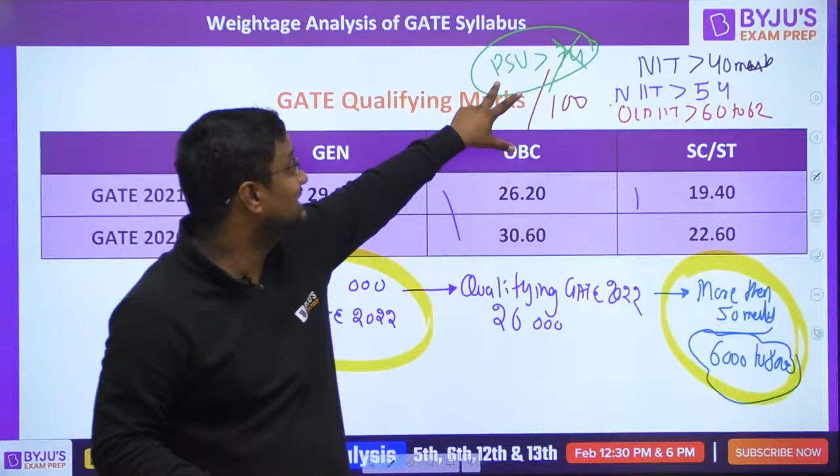For PSUs, I don't want to write a number. Why? It can be more than 74, but I don't want to write it, and I'm giving you a logical reason for that. Guys, the seats of NIT, new IITs, old IITs are almost fixed. NIT seats will not have huge variation in the coming year, same with new IITs and old IITs. But PSUs, the number of seats another year might be 3 times more or 3 times less. From last 2-3 years it is already less, so there are more chances of it being higher in coming years. So the number of seats of NITs or IITs will not change drastically, but these PSU seats may change drastically. So I'm not writing any number here, but if you want an average, it will be 74 marks.

HAL has not yet announced Hindustan Aeronautics Limited, but from my sources I'm getting it that tomorrow it will announce, and most probably 99% seats will be coming from civil also. Don't go to the site because till now the notification will not be there. It will be coming tomorrow or day after tomorrow.

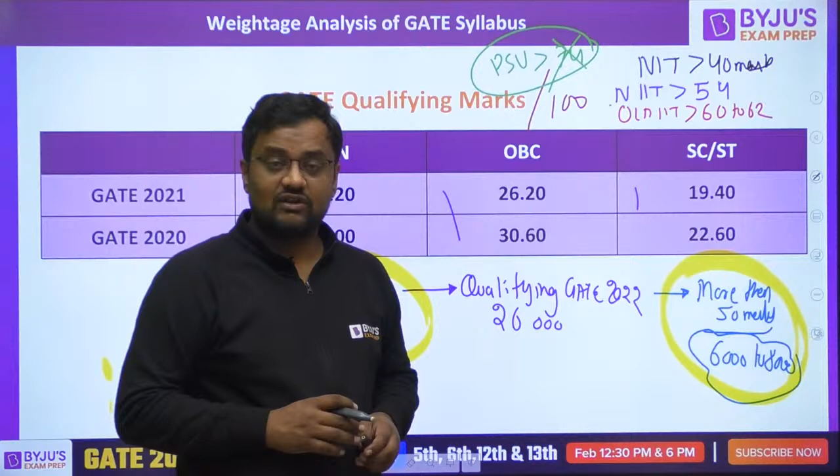Also guys, one more thing Rakesh sir has already made this in shorts, that yes, answer key will be available. I'm not getting the exact dates, might be 15th, 16th or whatever, you can see that short. Response key will be available just 2 or 3 days after the examination, and then around 21st or 22nd February. Your response key will be available around 15th or 16th Feb, I'm forgetting the exact date, and around 21st February the answer key will be available.

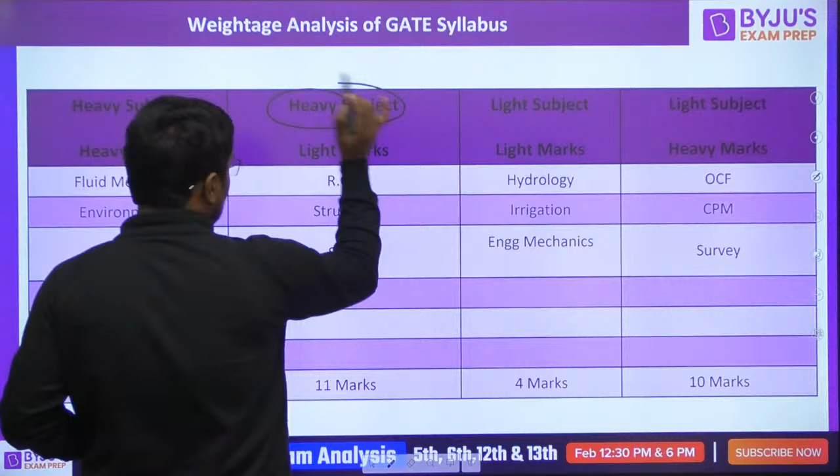Heavy subjects mean huge weightage like steel, structures, but less marks. Okay, light subjects, light marks like these, and less syllabus and high marks are this. I'll be sharing this all in my Telegram, Civil by Abhinav Sir.

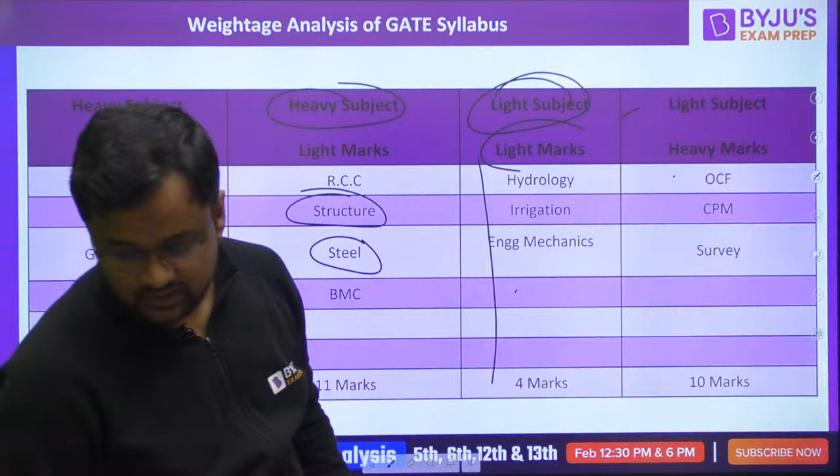And guys, yes, these are all the subjects that I told you. Come on, irrigation, transportation. And these are the things with gate, these are the things without gate. Will be coming after gate with a post-gate guidance program to all of you, and a post-result program also.